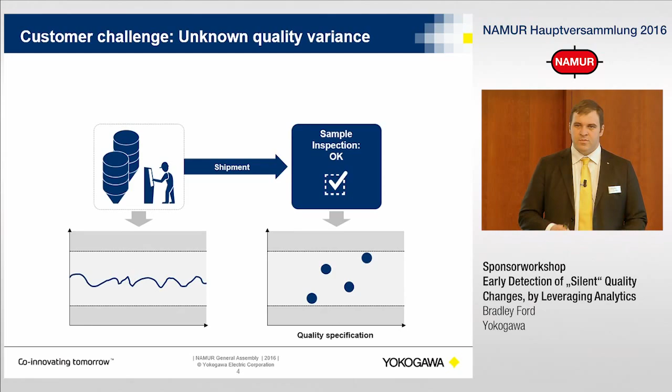So I want to give you 2 examples. The first challenge we've been seeing is around unknown quality variance. We're quite used to having our heavy equipment, having a particular fluctuation rate in terms of accuracy and consistency. For a long time, we've had quite stable customer quality specifications. So everything's been quite clear and simple. But slowly things have been changing.

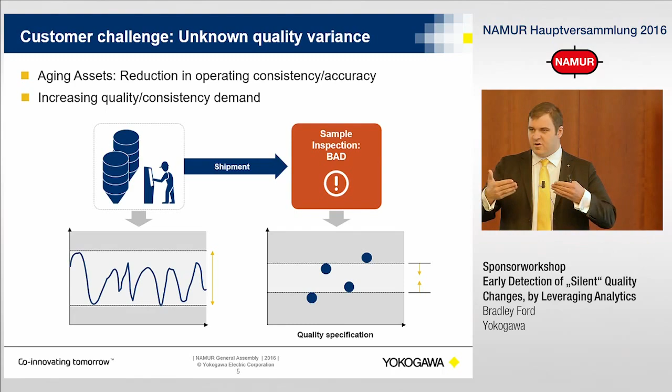We're seeing this in Japan through the lack of heavy industry investment. Our equipment, the variability or consistency of the product is now actually increasing. We're having more and more trouble to get that consistency of product quality. The challenge is that that's combined with these customer demands on quality becoming even tighter. So we're having equipment that is becoming a little bit less consistent, combined with customer demands that expect even higher levels of quality. These are opposites. So it's a really tough situation we're facing.

The next thing we've been seeing in Japan is what we call a silent change. This is changes that are impacting us that we have no idea about. We haven't done anything wrong, we've done the exact same thing. But for some reason, something's changing. Let me give you an example.

You're producing on the far right here. You're buying from one of your suppliers, intermediate products or raw materials. You've had this arrangement for a long time, and you have nice contracts in place that say, okay, you will produce this much, you provide that to us, and this is the specification you provide that to us in. As long as you meet these requirements, we will accept that product.

But for some reason, we've been observing that some of our customers are producing their product exactly the same way, the procedure is executed exactly the same, with staff of the same level of competency, but for some reason the quality changes. We've seen they don't actually know why in some cases. Some customers can find the problem; others are struggling to find where that root cause was, why they've gone from consistently on grade to sometimes on grade, sometimes off, sometimes downgrading their products.

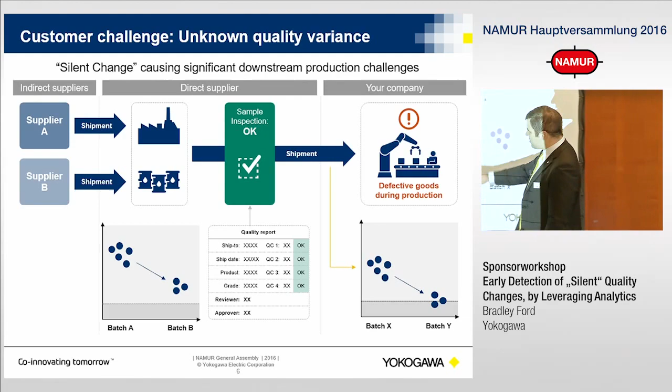So they've been facing this challenge of the silent change when they're importing product from various countries, and their upstream providers are doing their best business decisions to optimize their business within their contract. But it's now affecting them. So we've been working really closely with the Japanese chemical industry to find, okay, what can we do? Assuming we can't change the contracts, what can we do to solve this problem and at least get some insight into what's happening, so we don't have that batch Y problem in the corner?

So when you look at where to try to solve the problem—well, first of all, we could solve it in the supplier area, but you probably all work with procurement departments and legal, and it takes a long time. We're working in the real world; we have product coming in every day, we need to get producing. So we can't really change it at the supplier level.

Changing it at the end product level is too late—it's a waste of time. If the product is off specification, well, it's off specification—so we're downgrading it, or we're scrapping it, maybe reprocessing. So we need to do it in the processing phase.

The methodology we typically use is what we call a 4M. We first of all look at the machine—okay, well, are our assets doing well? We know they're aging, we know that'll have an effect on production. Is that the problem? Or is it materials—a variance in the quality of the materials, or even, as I mentioned, the silent change?

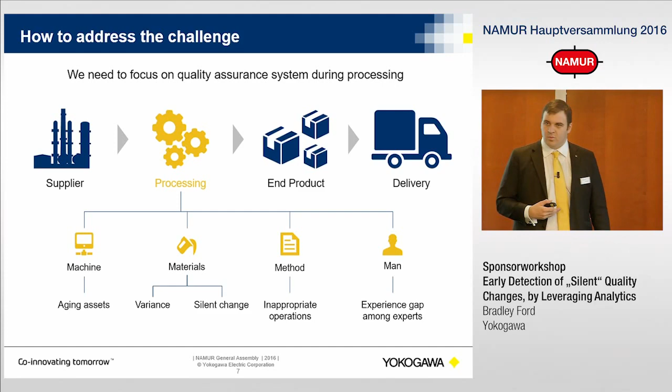In some cases, we see the procedures, the SOP. Has there been a change in the SOP? Or has there been a non-compliance of execution of that? And finally, capability of people. Again, this is a challenge we have a lot in Japan, where our workers have gone from being operators with us for 20 years to now being part-time or casual workers who maybe stay for 6 months, 12 months. So their skill and knowledge of our production is actually a lot lower than what it used to be.

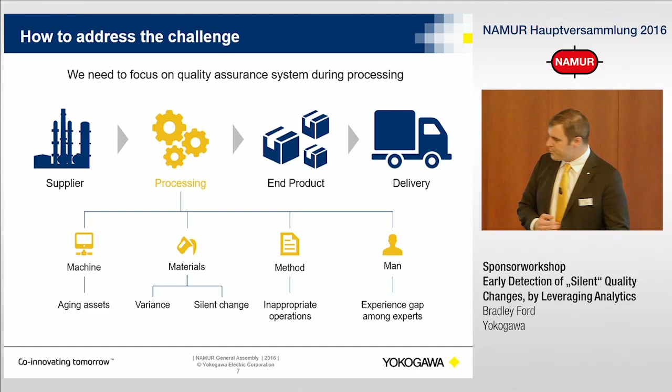Toyota is an expert at this. I'm sure you're all aware of Toyota's really good expertise at quality. They invest a significant amount of quality of time doing evaluations and checking at every single stage of their production, and then a very detailed investigation at the end. They're one of the best at the best. But they spend a lot of money and a lot of time, but also they have the opportunity to do the checking at each phase.

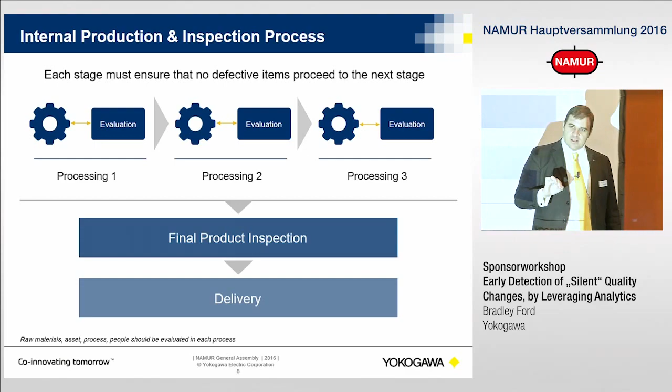In our industry, we don't always have that opportunity. Or when we do, it's already too late. So how do we move from finding out the problem here where it's too late to trying to spot the problem a little bit earlier where maybe we can intervene and try to save that batch, bring it back on spec, find what the root cause was, and solve that into the future?

We looked into this a lot in the Japanese industry and trying to see what we can do, and we found that most of the technology had a lot of false detections. And if you have too many false detections, the operator loses trust. You've all worked with operators. If it's not consistently accurate and reliable, they will ignore it or they'll turn it off.

In some cases, we found a lot of abnormal events were continuously occurring, and they're occurring at a rate that the operator couldn't respond. He only has so much time and capacity.

We found quite a few customers where they didn't know all of the key variables that would affect their quality. They thought they did, but maybe that was only 80%. And there was a couple of hidden parameters that they weren't aware of that actually had a significant impact.

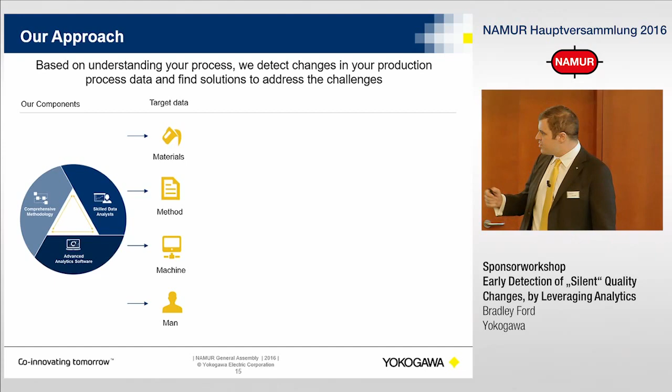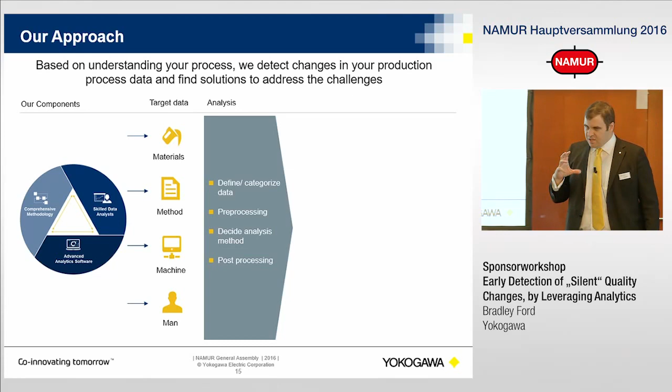That approach we take, again, we use the methodologies, the people, and the technology in conjunction with that 4M approach: man, machine, method, material, to go through the analysis phase, collecting the right data, categorizing that, processing that, choosing the analysis method, and that post-processing, some of that cleaning. After that, we can really start to pin down where are those root causes of the quality problems, summarizing that, doing a physical walkthrough before we give the results.

So the first thing we actually start doing is getting rid of those false detections. We want to make sure that the data we're working with is reliable and solid. So we spend a lot of time at the beginning really making sure, working with the quality control team, to eliminate those false detections. I'll show you an example of that later on.

We then next move into detecting some of those abnormalities. When we do go off specification, what is occurring? What are some of the root causes behind that? So then we start to only have on-specification product.

The next step we go through is suppressing the variations, so we're always hitting the same point on the dartboard. We don't care where it is, as long as it's the same point on the dartboard every single time. Then finally we start to really push that point as close as we can get to the bullseye, right in the middle. If anyone's done advanced process control, it's quite similar—you stabilize the process, then you push it to the limit.

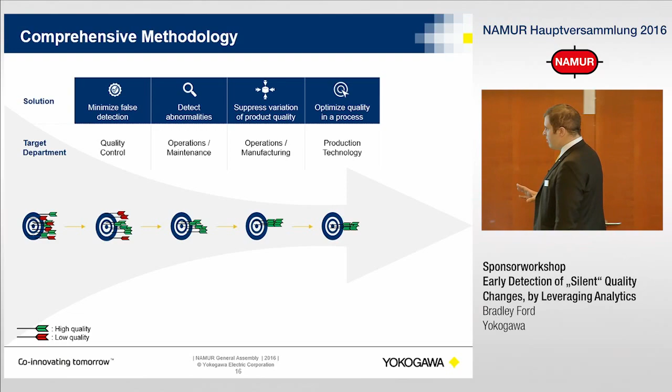Finally, once we have the plant running quite well and we're happy with this, then we start to run online. We hit the bullseye every single time, because now we're at the stage of really enabling the operator, giving him this information in real time. So as soon as something does start to drift, we say, look, we think there's a problem occurring. These are the areas that are indicating that to us, so maybe you should have a little bit deeper look.

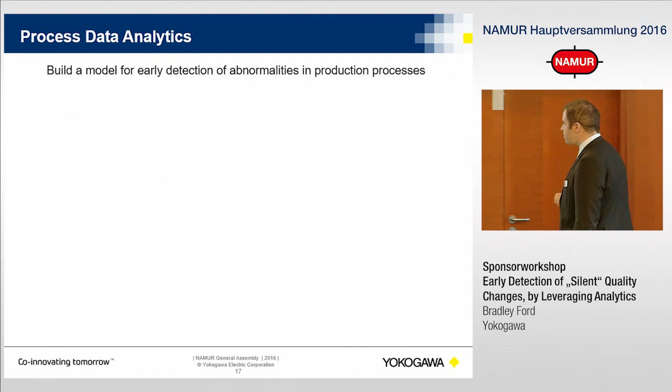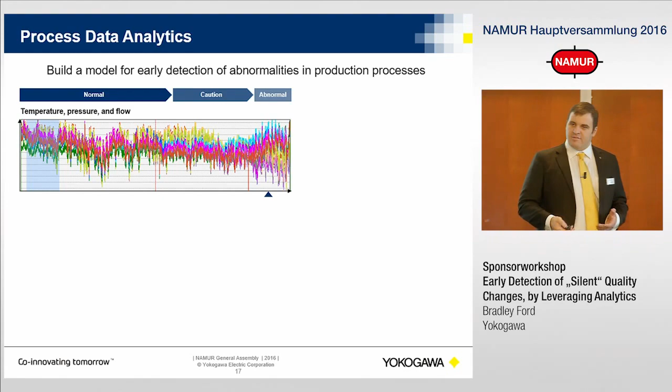Here's an example—you can see some process data. I'm sure none of you can actually see where the abnormal or off-track area is. It's impossible. Actually, you can see the caution point was here, the abnormal point was there. You couldn't see that from normal process data. This is what nearly every operator looks at—something like that. Actually, this is real data.

Through the technology we've developed, we convert that into this. This is actually the process data, the quality data that maps to what we're seeing at the top there. It's very simple to see. We know that this is what we call a Mahalanobis distance of about 7.8. We know this is a Mahalanobis distance of about 14.

We can see that back here, you were starting to drift off track into an area that we think is abnormal.

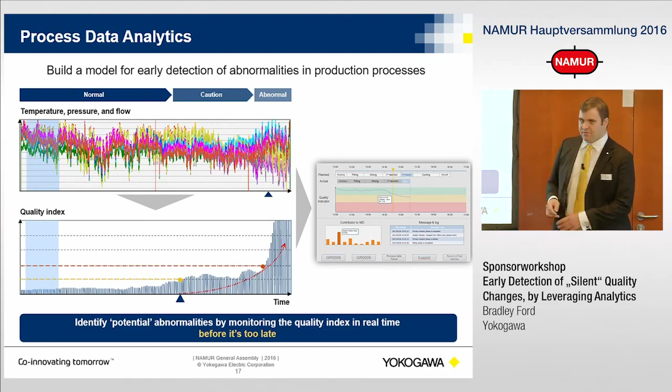But actually, we show that to the operator in a specific user interface where he can see the batch process, he can see the quality trend over time, and then he can click on the points in that quality indicator to say, this is what we think the root causes of that problem are.

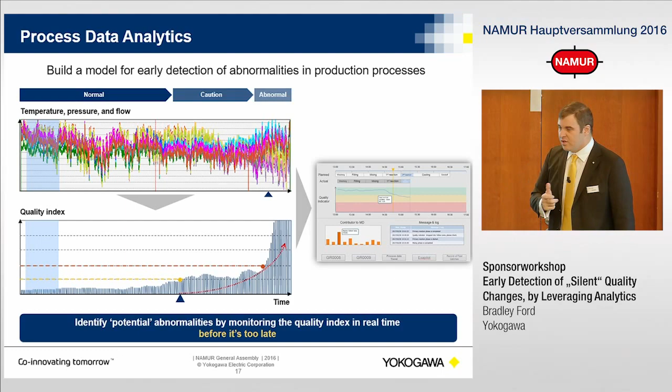So we're converting highly complex data into something that's very simple. You don't need to concentrate deeply, but you can quickly identify where the problem is, or the rough area where it is, then allow the operator to use his knowledge and expertise to really precisely find that and hopefully resolve it in a reasonable time.

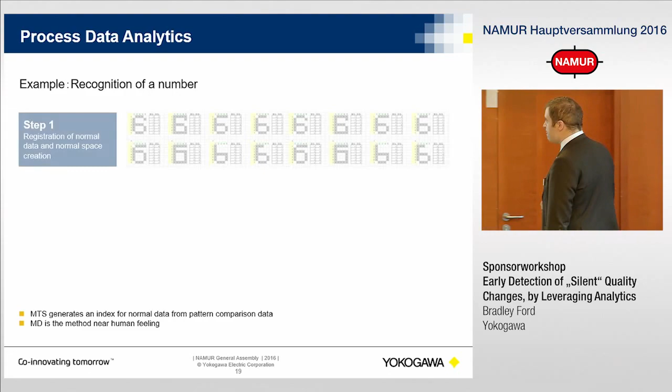So the technology we use here is called Mahalanobis Taguchi. It's a specific analysis method for quality optimization, originated in Japan. You can see here what we're actually doing is a type of pattern matching. Here you can see some of the registration data we used for the number 6. Every one of those looks pretty well like a number 6, roughly speaking.

What about the next row? Do they all look like a number 6? No?

Any thoughts on which ones are 6 and which ones aren't? Only one isn't 6 - which one is it? Is that a 6? That's a 6?

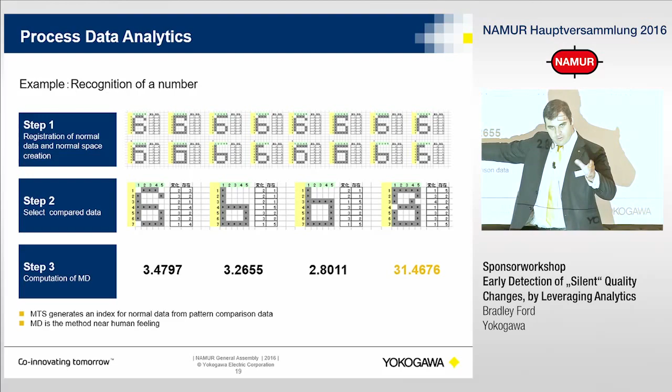No. So this technology we're using has converted that to a number, and it said this is 3.47. We think that's pretty correct. 3.3, 2.8 - that's all below 7.8, so we're happy.

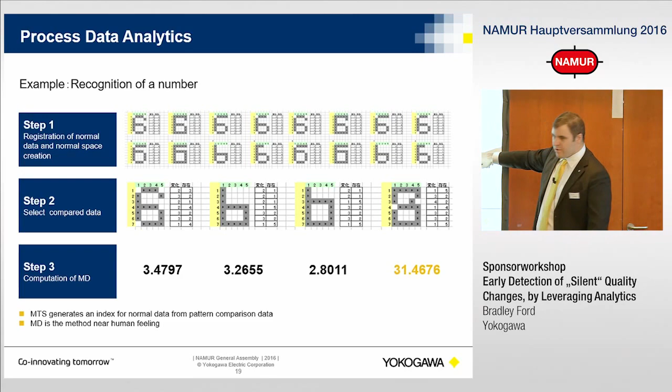31.4 - that's a problem. We know that's out of the optimal operating range.

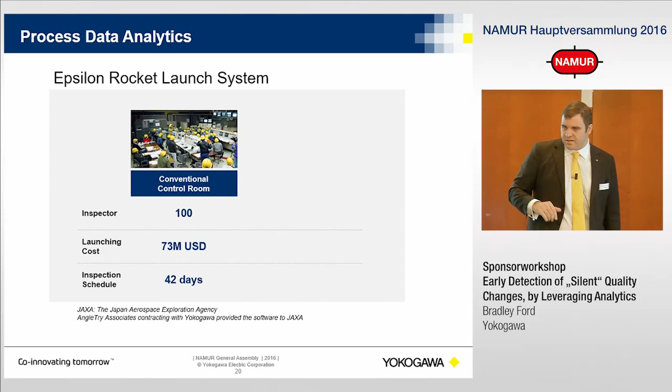Actually, this same technology is being used by JAXA in Japan, the Japanese Space Agency. They have a rocket called the Epsilon rocket, and they've been using the same technology to do their quality checking.

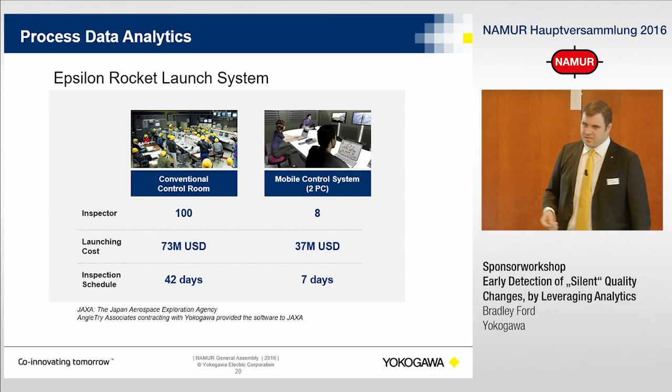You can see they used to use 100 inspectors, about 42 days, and a significant amount of money. After they started using this technology, they dropped that down significantly - 100 people to 8, with a 7-day inspection cycle. That's quite a significant reduction, yeah?

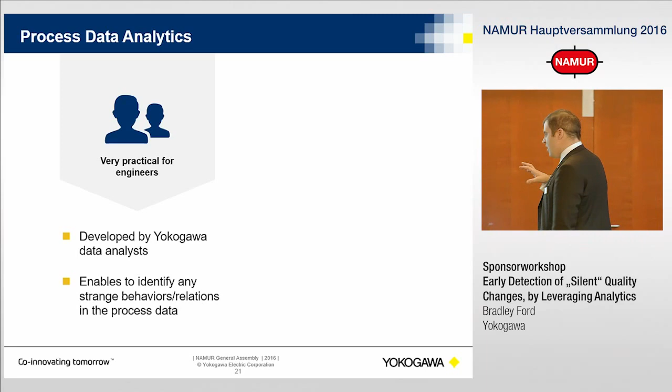But what we tried to do, as I mentioned at the beginning, is make this quite practical. Not every company should need to have a data scientist. So we tried to get our data scientist skill and knowledge embedded into the software, so if you're an APC engineer you can take this and utilize it within the facility, or we have a whole team that's ready.

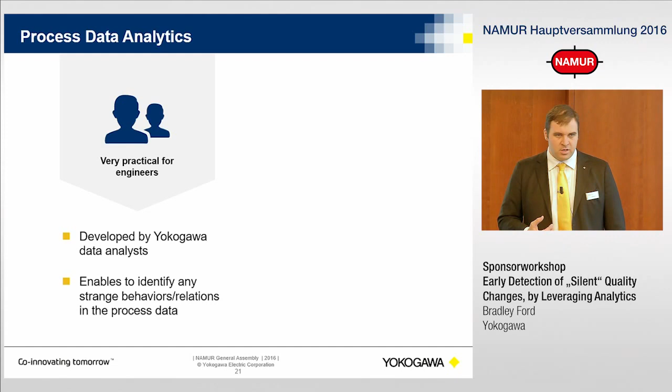But also what we found in the chemical industry is there's a lot of secrets - companies have a lot of their own IP that they don't want to share. They don't even want a third-party company to get involved in the analysis at all. So what we actually added, embedded in the automatic processing cycle, was MATLAB. You can build your own MATLAB logic and knowledge and embed that in there, adding it into the software. So in terms of our standard processing cycle, you can add your unique knowledge at the same time.

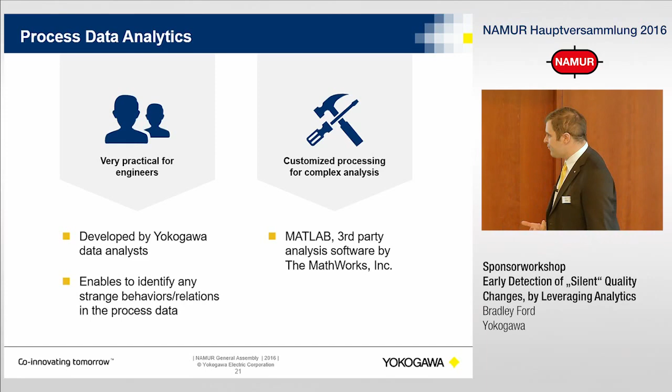So to give you some examples, we have a full team globally that can support and help do the consulting. We do a lot of work in Japan with this team, helping the Japanese industry. We launched the product 3 weeks ago, but we've actually been working with the industry in Japan for the last 2 years on this technology.

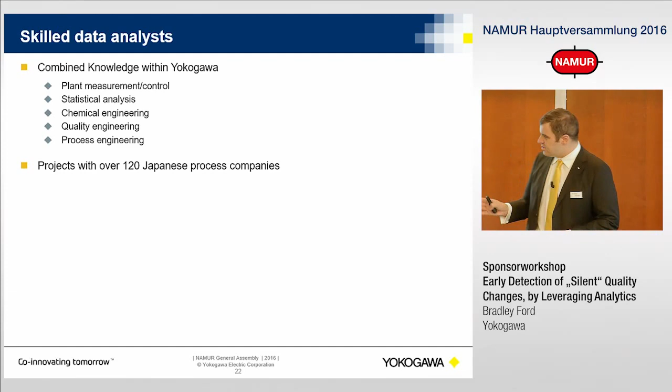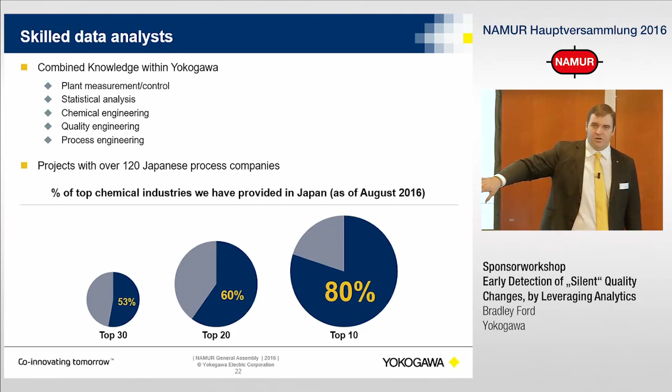So now we've had over 120 Japanese projects underway - most of those are still ongoing in terms of operations. But what's most interesting to me is that of the top 10 chemical industry companies in Japan, 80% have already been using the technology to improve their quality. When you look at the top 3 countries in the world - Japan, Germany, and the US - we've only been selling this in Japan so far, and most of the best companies have already been utilizing this to improve their quality.

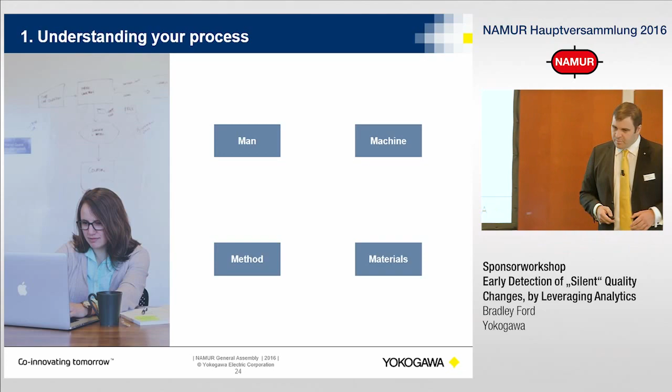Again, it's really built around the 4M framework. Man - what are they doing in the steady state? What happens when things go wrong? How do they handle that? What do they do that's unique when things go wrong?

Machine - how's the reliability and consistency of production been in terms of our equipment? Methodologies - are our people executing SOPs consistently in the same way, and also in compliance with the SOP? And finally, the material. As I mentioned, the silent changes we've been seeing in Japan are primarily in this material area, where things are coming in that are different than what we had seen in the past.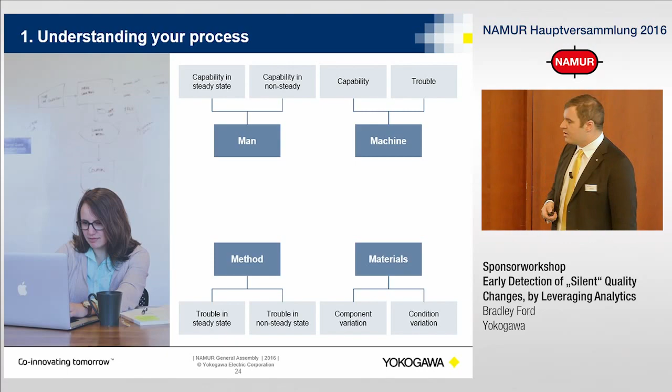So in the data analysis phase, we actually bring in the process data, from the data historian or some other source. But we also bring in the quality data from the lab. We want to know which batches were produced at which time range, and what was the result of those batches - were they on specification? Was that the golden batch? Was that close to the golden batch? Or was that something that was a lost product?

Then we start to go through that comparison phase of really comparing, well, what is good? And where have we had some of those failures in the past? And what were the root causes behind those failures?

And finally, the indicators. This is where we think the problems are occurring. So just let me get some water before I lose my voice.

So we look at the benefits here, what we've actually been seeing in Japan. First of all, they're achieving their quality targets. Yeah, this is obviously the most important one now.

But also what we've been seeing is interesting is they're building their customer credibility. Their customers have actually been quite happy that now they're always achieving target. The potential for products coming in that are lower grade than was expected has been reduced. So their credibility as a supplier has increased.

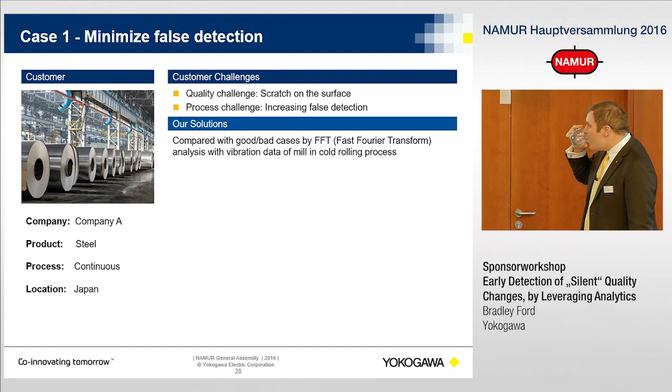So I've got 3 cases here I want to go through before we finish and have some questions. So the first one was a steel company.

They were having some problems where in the steel sheets, as they're running through the production line, sometimes there was some vibration, and they would get a scratch, and then that reduces the product grade, because it's not a clean sheet anymore. So they went through and said, okay, let's put in some fast Fourier transform technology to actually try to understand what was happening, what caused these vibrations that resulted in the scratch.

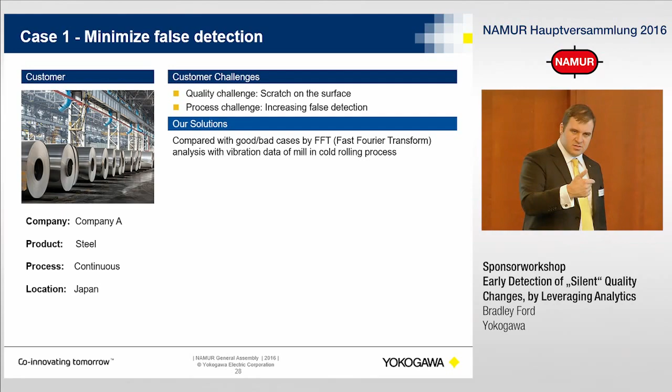So why would Yokogawa get involved, and why would they come to us to start to solve some of these problems? Well, first of all, we have our data scientists and APC experts, but we also have a whole operations team as well. You heard about KBC yesterday.

They have a whole team of process engineers, operations engineers. So that unique combination of data scientists combined with process engineering and steady-state simulation technology. We have a lot of experience now in Japan actually executing these projects, learning with the Japanese industry of how to improve quality, how to spot these problems, and how to advise the operator early of what could go wrong.

This unique pattern recognition technology, currently we're the only people actually in the world utilizing this type of technology in the process industries. For the core technology here, we have the global unique access to that.

We're solving problems that many of our customers cannot solve. So we're working on a project at the moment in Europe, and they came to us and said, look, we're having a quality problem. Our customers are complaining, but we have no idea why. Can you come in and help us and support us? Bring in some of your experts, some of your technology, and help us work together to actually find the root cause behind this so we can get on with making good quality product.